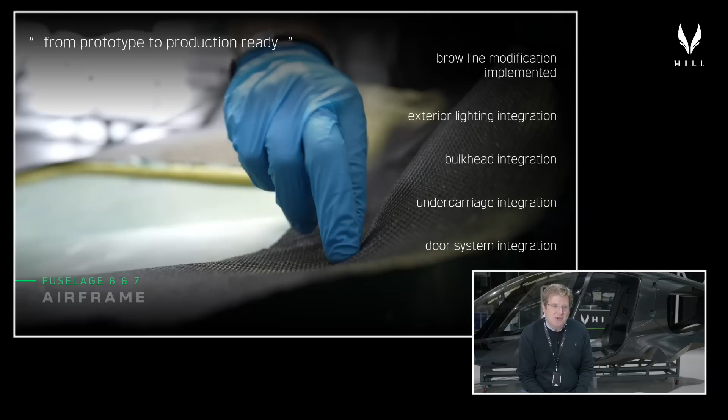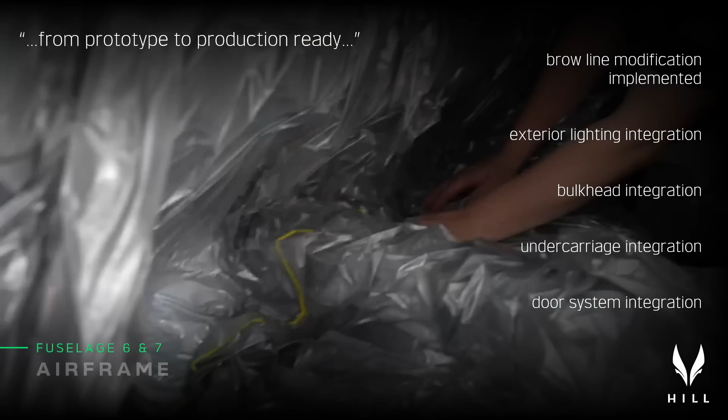Let's start with an update on the build of fuselage 6 and 7. As I explained last time, these fuselages are a culmination of everything we've developed in the program to date. All of the improvements and enhancements to manufacturability, processes, and core design are embedded into both fuselages. They include the brow line modification for improved view angle, the exterior lighting integration for our developed lighting clusters, the carbon fiber bulkhead integration, and all of the mechanical components needed to receive the undercarriage systems and the cabin door systems.

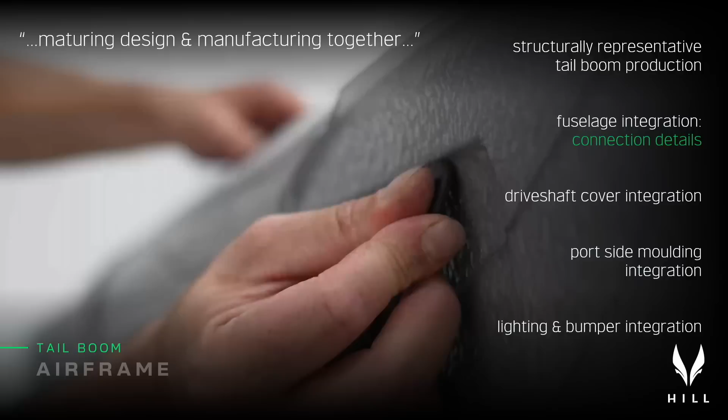In addition, we've been working through the development of the first two structurally representative tail booms. These include all the features needed to attach structurally to the monocoque, all the features to attach the drivetrain and mechanical components, and a representative laminate as well. All of those things are in there, and we'll be heading down to DC2 to have a look at these in just a second.

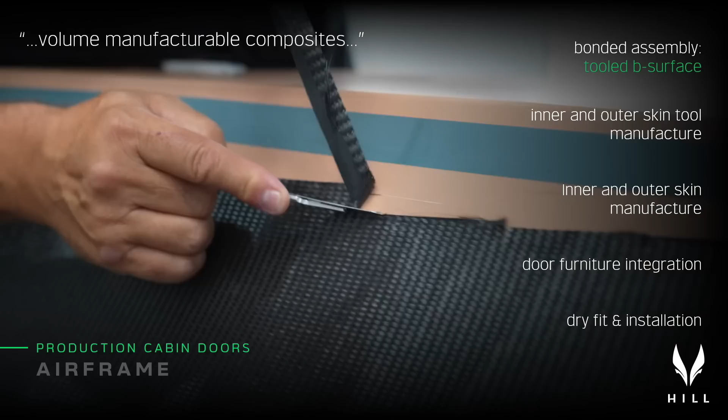We've also been extensively developing the new versions of all the cabin doors. These are the cabin doors that use bonded assembly, with both a tooled exterior skin and a tooled interior skin, trapping all the door furniture and bringing those together in a much more production-oriented process. I'll give you a significant update on those directly from DC2. So without just looking at slides, let's head down to DC2 and DC3 now, and I'll show you what we've been doing over the course of the last month or so.

Welcome to DC2, and at the moment down here it's doors, doors, doors. The guys are furiously laminating the doors for the front of the fuselage, the rear of the fuselage, and the cargo doors. There are 12 to do in total for the two airframes we're building at the moment. Let's go and have a look at what they're actually building.

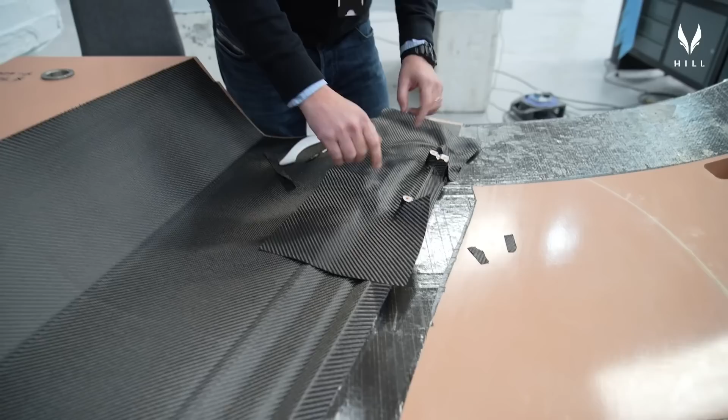If we move over to this station, we've got a similar operation, but this time it's a rear passenger side door. The first plies are down, the door handle metallics are in there, and the guys are just laminating over the top to trap and bond the metallic inserts into the fabric of the door.

Again, you can see the modification we've introduced here, where we've built in the notch to receive the signature lighting strip that we've got built into each of these doors.

There's a further pilot's door skin here, so this is a front door, pilot's door, outer door skin. That's being laminated and should be ready for curing later tomorrow.

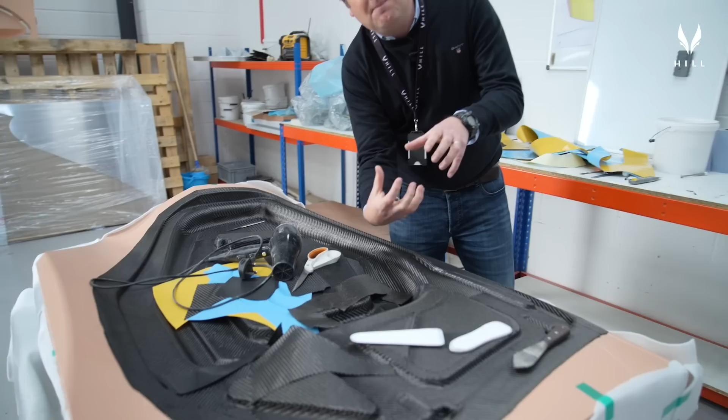If we go down here, you can see the internal skin of the baggage bay door. The internal skins tend to be much more intricate because these are the skins that form the depth of the structural sections that give the door its stiffness and provide the pockets for the hinges and the locking mechanism and everything else needed to make these doors work.

Once these panels are cured off, they go into a glue jig, they're glued together, and then they can be trimmed and fitted to the airframe using the hinges and other mechanical components being developed up at DC1.

The only other thing we've got going on here at the moment is another B surface. This one's a little bit further on, it's under vacuum bag being debulked, ready to cure shortly.

If we go have a quick look at what we've got going on in the oven, excuse the darkness. We've just shown you the internal surfaces for the cargo doors. What you've got here is a left-hand and right-hand external skin for the cargo doors on both sides of the airframe. They're all bagged under vacuum and ready to cure.

We get a full oven load of components in here this evening, and this will be curing right now while I'm talking to you guys.

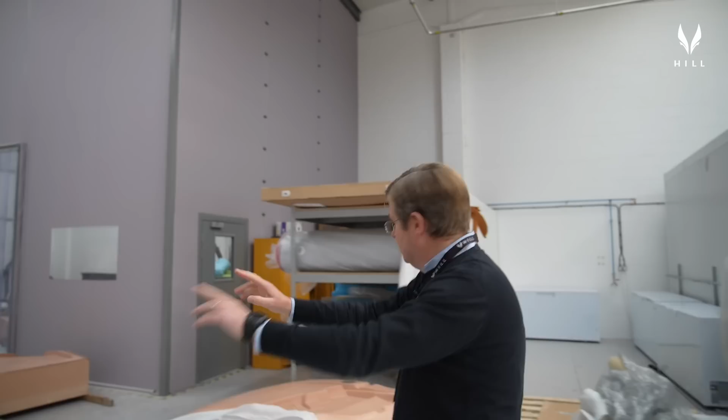Let's have a quick look at what's on the gantry mill. As you can see here, we've also got other tools waiting to be laminated. We've got rear door B surfaces for port and starboard, and we've got the rear cabin bulkhead, that's your baggage bay bulkhead there.

And then what we've got here, this is the co-pilot's door inner skin. So this is the last of the door tools we need to make to be able to produce the final door for the HX50 fuselages.

One thing you might notice is that one side of the table on the gantry mill is inoperative at the moment. We're having more issues with this machine, and I'll talk about what we're going to do about that a little bit later in the presentation.

Let's go over to DC3 and have a look at some fuselages. Welcome to DC3, and this is where things are getting really exciting.

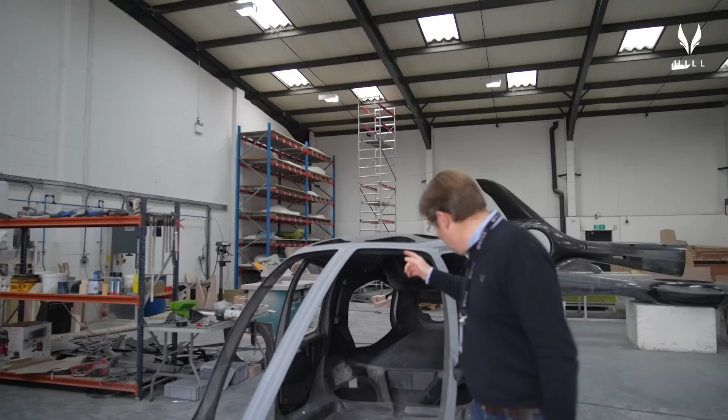We focus on laminating and component production over at DC2. Here in DC3, the guys are doing a lot of the gap and flush and fit and finish work on the full airframe. This is airframe 6 that's just come back from its first layer of surface treatment and paint production. What you can see here is we've now got the updated brow line into this fuselage and fully worked in.

The exterior has been prepped from a surface point of view, so it's ready to be painted. You'll also see with this one that a lot of the metallic elements of the structure required to mount the undercarriage are in there also.

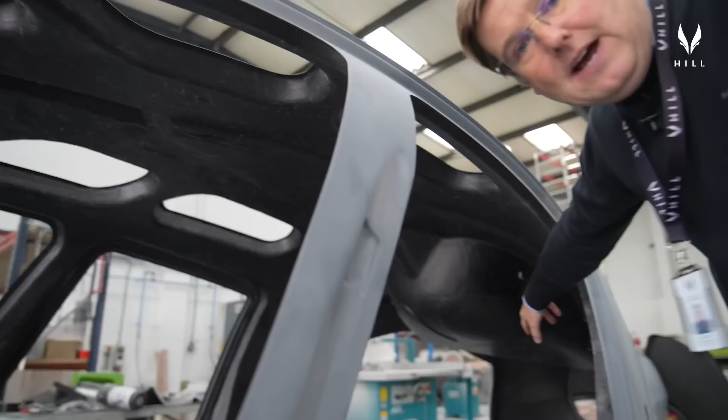You can see the undercarriage mounting pads down in the stub wings, and the receptacles for the undercarriage locking struts. We've also got all of the metallics up in the roof to pick up the gearbox, and of course all of the metallics down in the tail boom to pick up the structural loads from the tail boom. The fuselage has been fully trimmed, so all of the apertures have been trimmed back to size.

On these prototype airframes we're doing that by hand using the trim lines built into the tools and patterns. In production this will be robot trimmed using a bigger version of our robot that we'll show you down at DC1 a little bit later.

In addition to this, the other things we've been doing is essentially making sure we've resolved all of the edges properly so that when we come to fit the doors, we've got nice clean gap and flush.

We've been tidying up the edges for the glazing, where it fits on top. You'll notice here we've got a test cabin baggage bay door skin - this is an outer skin. You saw the inner skins being produced over in DC2. That's been trimmed and is up there just to dress it and get it ready to be fitted.

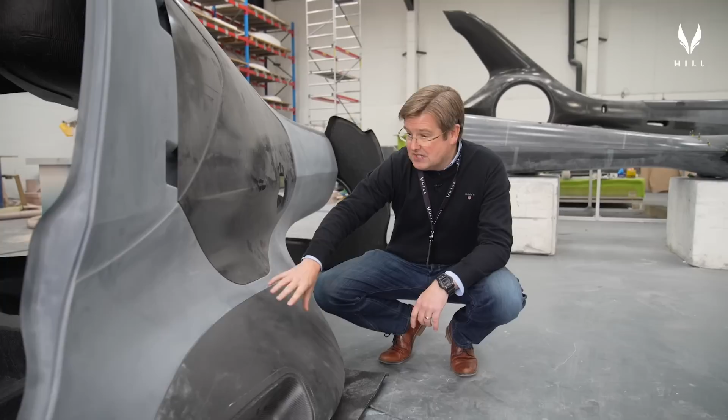You'll also see for the very first time that we've got the non-structural wing covers on the airframe. You're used to seeing just the structural elements, the painted part. This is the wingtip cuff that makes up the rest of the A surface you're used to seeing in the renders, and this is the recess for the landing light, the wingtip element, which I'll show you later.

Really pleased with how all of this is coming on - it's looking absolutely great. The fit and finish of these components has really exceeded my expectations, particularly given the challenges of working with very hastily produced prototype patterns and molds. But the guys have worked wonders getting this all to sit together right. I'm really excited to see the rest of this come together and get it painted up and finished.

In addition to the external fittings - the wingtip covers, the doors - we've also got structural internal components. This is the carbon rear cabin bulkhead, which fits inside the fuselage at about this point. This big molded aperture is so we can get the bladder fuel tank into the cavity between the cabin rear bulkhead and the baggage bay bulkhead, and it fits snugly inside there. It's been dry fitted and fits just fine, which is good news. We've got two of these waiting to go into the fuselages as we assemble them.

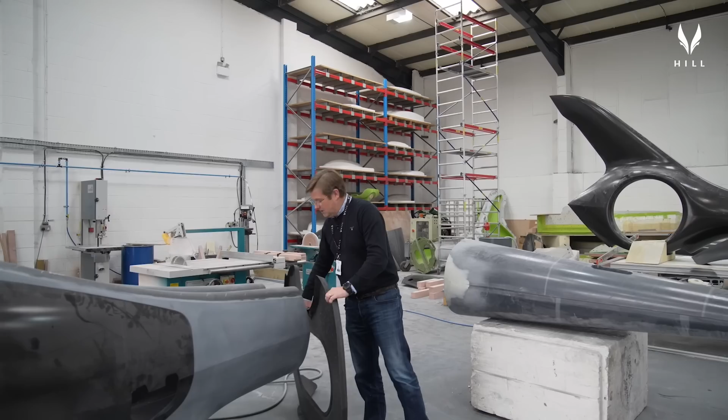That's all good. I showed you over the road that we're busy laminating doors. This is a B surface for one of the rear cabin doors. Again, it's an extremely light piece of structure, but all of this integrated form provides the structure we need to carry the armrest loads and pick up all the locking mechanism details as well. Really pleased with how the guys are getting on with the door skins - they're coming together very nicely.

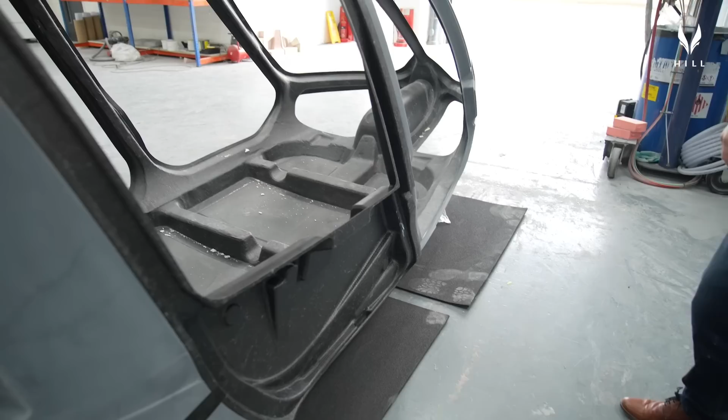If we go around and have a look on the other side of the fuselage, you'll see we've also just offered up the very first trimmed B surface. This is the rear starboard side door, and it fits just nicely - the overall form of it's fine. We've got to get that bonded up now, well, skin pinned with its A surface. That'll take account of the pushback from the seals once we get those fitted, and then that door can be hung and will sit really nicely on the fuselage. Really pleased with how that's coming together.

Let's go and have a look at what we're doing with tail booms.

This is the second structural tail boom that we've produced, and it's had the most prep work done on it to date. As I mentioned earlier, all of these composite components have been manufactured with prototype tools that were very hastily put together. They were all about process development, not about getting the most perfect surface finish. So to get these paint ready, the guys have had to do a lot more patchwork, filling and sanding than you would do in production.

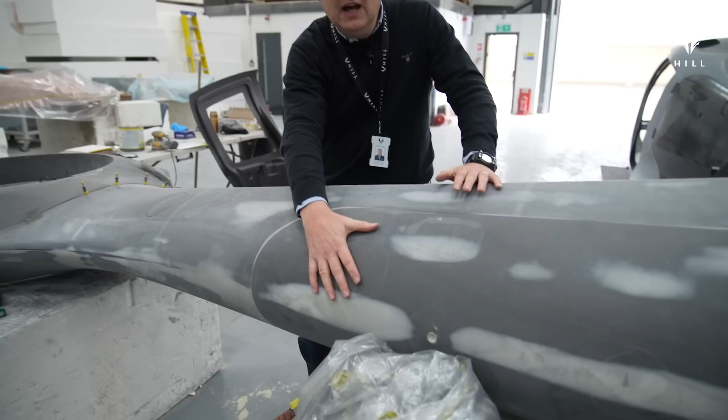What you can see here is the structural element of the tail boom - the tail boom cover that covers the drive shaft as it goes down into the tail boom. For the very first time you'll see the second side of the tail boom. The construction is made in one piece, except for this top closure on the exit side of the duct, which allows us to trap all the internal fixtures for the stator of the ducted fan assembly. This panel has been trimmed and bonded on today, and the final stage is to fit the bumper panel on the bottom. We've also made the modification here to take the modified tail light, which I'll show you a bit later in the presentation.

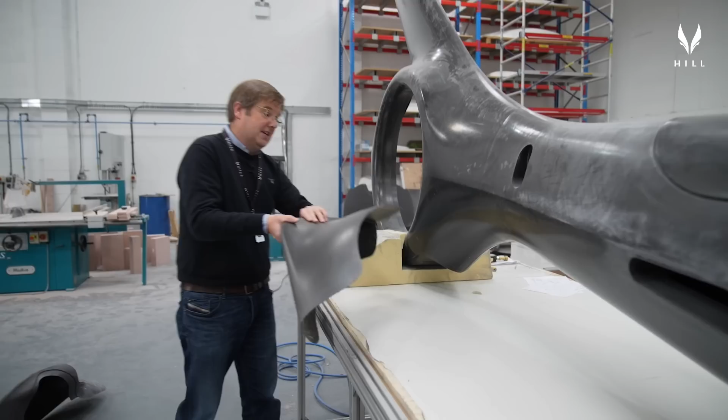From across the board down here, the guys are making fantastic progress on all of the composite elements of the program. We've got fuselage 7 out at paint at the moment, and then we've got a bunch more fitting to get the tails integrated. All we've really got left to make in terms of composites are the last of the doors and the non-structural elements that sit on top of the fuselage. Fantastic progress from across the program over the last month.

Let's head up back to DC1.

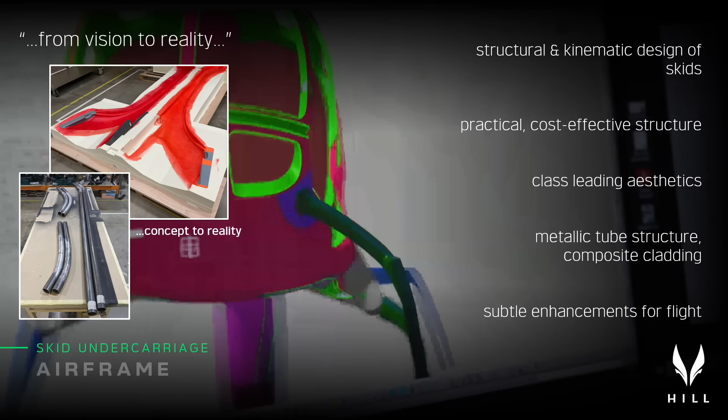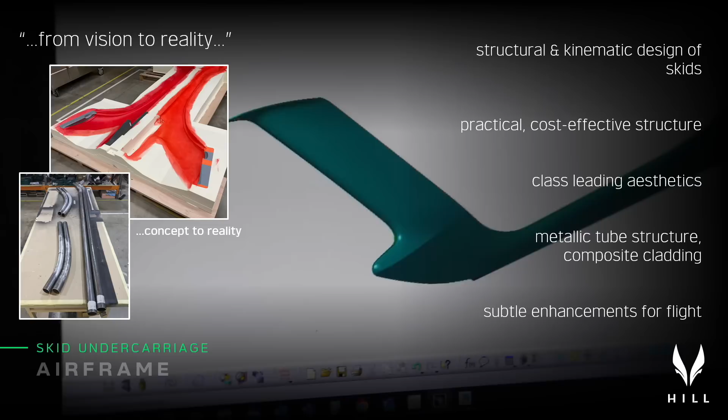In addition to the work on the core fuselage, we've also been doing a lot of work on the first set of prototype skids that will be sitting on fuselage 7. These are structurally and kinematically representative of the skids we'll use in the flying prototypes, the only difference being there's a bit more weight to come out of these before they're ready to fly. We've come up with a practical, cost-effective structural design, a hybrid of a conventional metal tube structure that couples nicely back to the dampers in the fuselage, with a cladding to deliver the sleek look of the skids.

The metal tube structure is currently about halfway through being produced, and we've just finished the molds to mold the composite cladding that goes around the legs and down tubes. We've also been developing all of the mechanical components used at the top end of the skids to fit them back into the fuselage structure. There's actually on the 5-axis over there the last of the receptor couplings that connect to the metallics buried into the structure, so really pleased to see those coming along. I know there's a lot of guys out there keen to see how we're doing with skids, so just a little update: they're coming, and they're going to be ready for December.

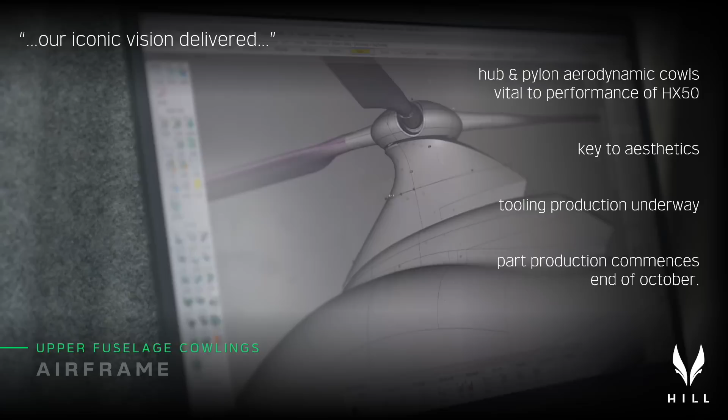In addition to that, one of the things most distinctive about the HX50 is the cowled rotor system and the very carefully aerodynamically cowled pylon and mast. This is a particularly difficult area to do well because of the movement you have to allow around the root of the rotor blades, and it's also really important that we deliver on the aesthetic promises of the design. I'm pleased to say we've delivered this in spades - I'm absolutely over the moon with how this has come out in final design.

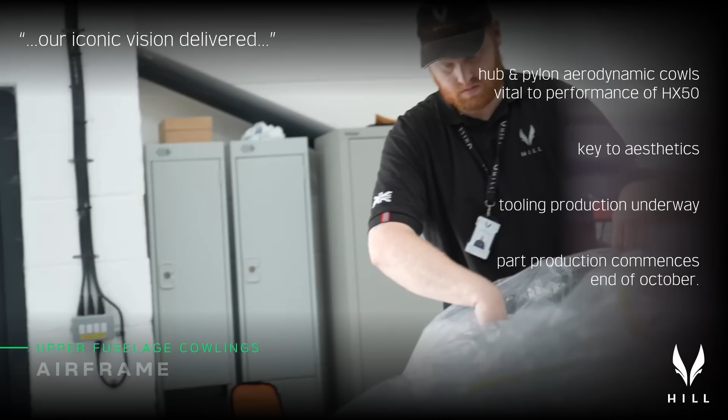The production tooling for all of this is currently underway. The guys are busily finishing the last of the tools to develop all of that cabin top structure, both the cowls that surround the engine and all of the plant and equipment that lives on top of the fuselage, and also the donut cowling that surrounds the main rotor hub. We expect part production of those to start in around 2 weeks' time, and those will be the last components we need to make for the two machines we'll be displaying in December. Really pleased to see all of that coming together.

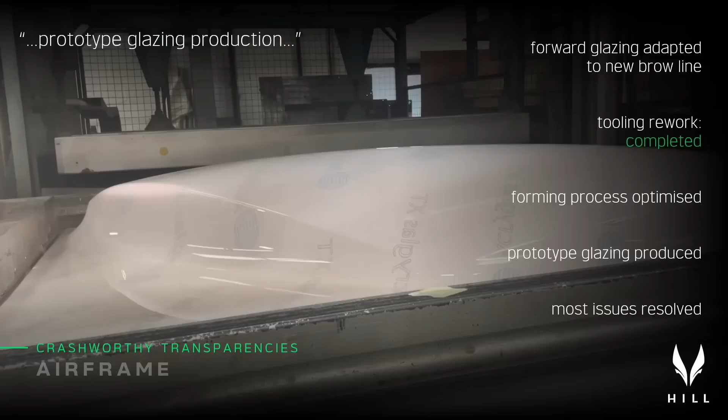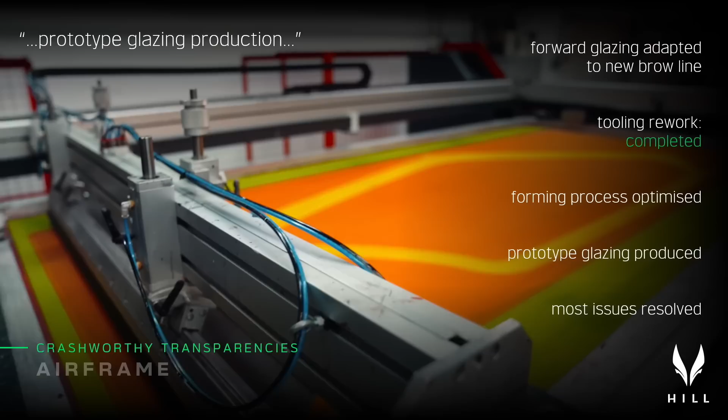In addition to that, we've been talking at length over the last few months about our endeavours to deliver high optical clarity, high quality, crash-worthy glazing for the HX50. We've been doing a lot of development over the last month or two to improve the quality of the tooling we use to deliver optical clarity. It's relatively easy to form these materials, but quite difficult to form them really well, particularly when you move to polycarbonate for the impact resistant windows on the front. We've completed all of the rework to the tooling, taking into account both the shift in the brow line and the surface rework needed to deliver a surface capable of producing optically clear windows.

We've optimized all of the forming processes necessary to deliver high quality windows, and we've now started to produce the full batch of glazing that we're using for the two machines we're delivering in December. Fundamentally, all of the roof windows and side windows are now at a level we're satisfied with for production. We've got a couple of issues left to sort on the chin windows, but fundamentally we're satisfied now.

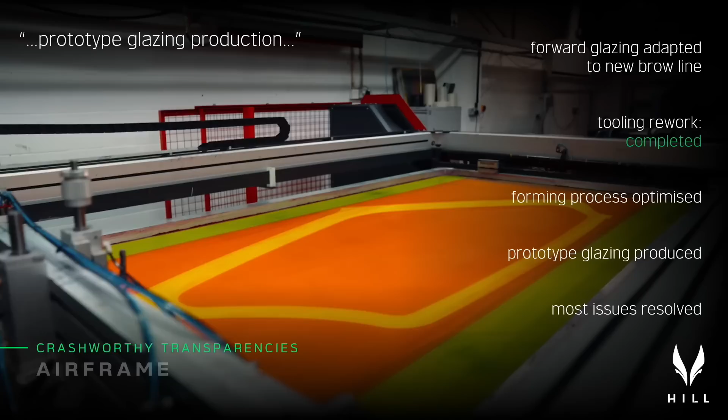Let's go and have a look at a couple of the examples we've got lying on the shop floor over here at DC1.

So what you can see here is the first of the vacuum formed chin windows that's been developed using the latest tooling. All of these areas here are excess material that will just be trimmed off, and the actual chin window, which sits under the nose of the helicopter, is this portion here, and the trim line sits about an inch inside this. These are now being produced to a quality that's sufficient from an optical and performance point of view.

There's a few things we'll refine for series production, but these are plenty good enough for where we need to be at the moment. These are the most difficult windows on the whole aircraft to produce, because they have curvature in both directions and it hugs the tool very closely. Until you're using heated aluminium tools that are highly polished, this poses real challenges for the composite tools and the model board tools we're using at the moment to keep costs down while we go through the development process.

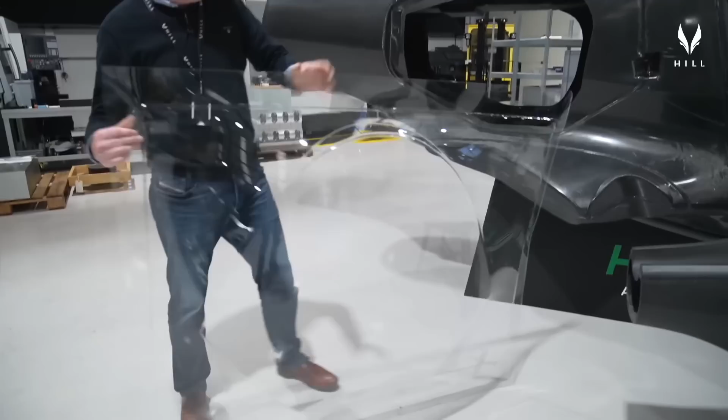What you can see behind me here is the forward roof window, and this one is a lot simpler to form to a high degree of optical clarity on account of the fact that it's a lot flatter and has a lot simpler curvature.

So we've got all of these produced now, and we're expecting to get these units trimmed over the course of the next week on the gantry mill, and then they can be dry fitted on the fuselage, ready for the rest of the panels to butt up to. Really pleased with how the glazing's coming on.

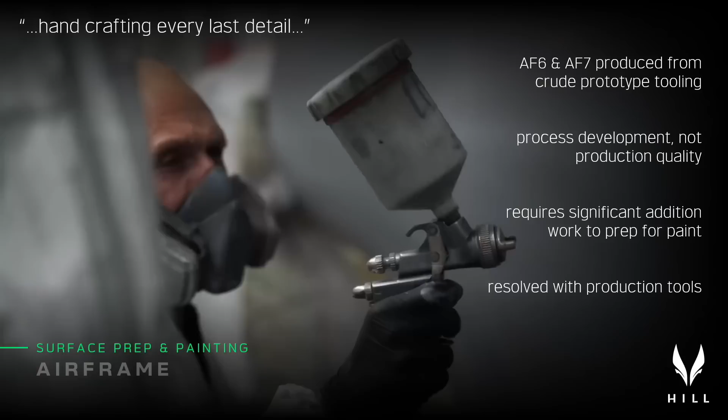One of the areas that we always knew was going to be challenging was painting these early fuselages. As I've said on multiple occasions, the tooling we developed for the early stage prototypes for HX50 was very much about bringing together all of the elements from different industries necessary to make cost-effective composites at this scale and in these volumes. What that has meant is that it was very much an expedited process - all about the process development and not the finished surface quality.

So the surface on the tools we've been working with to date isn't at the same level it will be in production. What that means is, unfortunately, the paint guys have an even harder job to do to get a decent paint finish on these things for the first fuselages.

Over the course of the last week, fuselage 6 has been out at the paint shop, and the guys have been doing all of the surface preparation, priming and surface rectification to get that fuselage up to the point where it's a high quality paintable surface, and they've done an amazing job.

Don't worry about any of these details, because fundamentally all of this comes from the tools, and with the new gantry mill arriving in January and the refined production processes for patterns and tools, all of these things will come straight out of the mold for production.

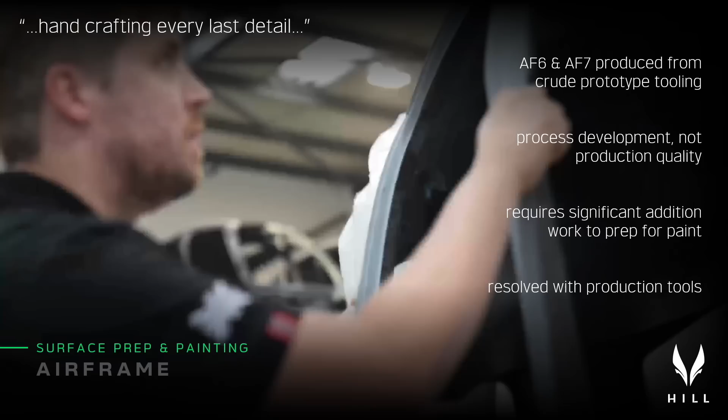Over the course of the last week or so, fuselage 6 has had its several coats of primer and a lot of surface work, and fuselage 7 is out at the paint shop right now, getting ready to receive its final colour. Really pleased with how that's gone over the course of the week.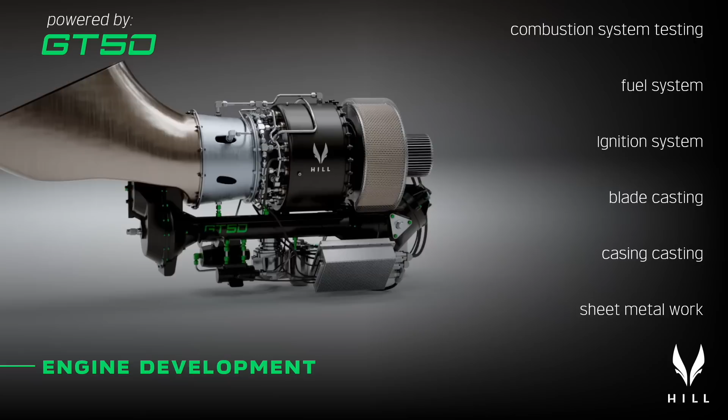Let's talk about the engine program for a little while. Over the course of the last month, our main focus has been about preparing to do the combustion system testing. We finalised the design of the combustion, the core combustion test rig elements. All of those things are now either here or in production at the moment. We have essentially produced now all of the fuel nozzles and the air blast atomizers, and we have the ignition system here.

We've also been doing some further work on blade casting, and I've got some good news to report on that. And we've been starting the journey on the casting of the big thin-walled casings, which is one of the other challenging areas with the engine development. We're now converging on the finished annular combustor itself, and I'll be showing you a little bit more of that in a second.

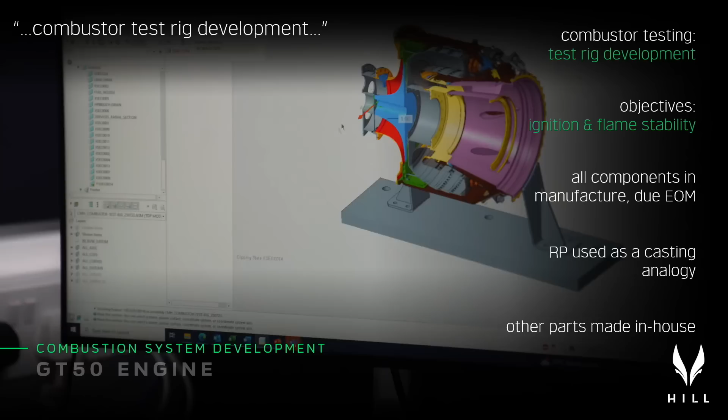So as I mentioned, a lot of the work over the course of the last month has been about refining the combustion test rig and getting all of the additional equipment you need beyond the engine hardware to run a successful test. The guys have been efforting that over the course of the last few weeks. The objectives, of course, being to show that we can get effective ignition, stable combustion within the environment, and get that fire burning.

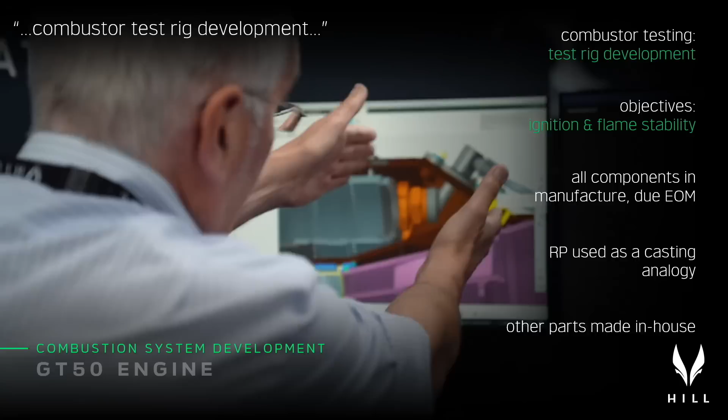All of those components are now in manufacture, and these will all be here before the end of the month. One of the things that we are doing for the combustion test is using rapid prototyping as an analogy for the casting processes for the casings, just to give us the flexibility to change anything that we need to before we go on to the full-blown gas generator test. Everything else that you can see in the combustion test is being made right here at DC1.

So if we talk for a second about the annular combustor, we've now perfected the rolling process. We've perfected the stretching process to produce these annular rings perfectly to tolerance, and we're now building up the stack of internal and external rings ready to get that welded together, and I shall show you that in just a second.

We've had some issues with spinning the end cap, so if you think of the end of the donut on the annular combustor, and so the guys have been machining some of those components from solid rather than spinning those in the short instance. In production, those parts will actually be pressed, but I'm loath to lay down a press tool until we know we've got the geometry right. So Mark's been working around that for us, and I'll show you some of the components that we've been making in just a second.

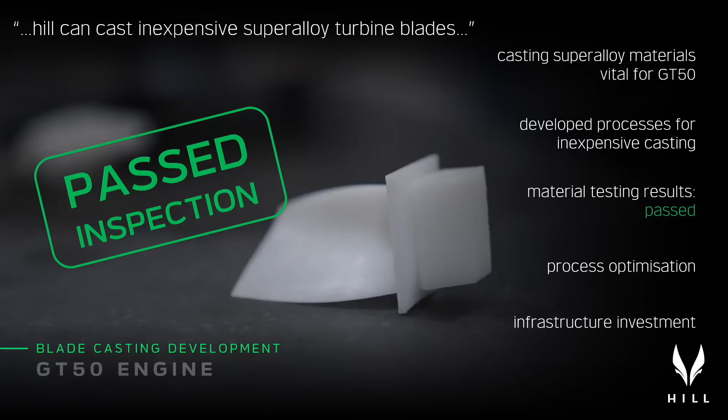The other big news is that over the course of the last few weeks, we've been doing a lot of NDT and a lot of inspection on our in-house cast superalloy turbine blades for both the gas generator and also the power turbine. And I'm delighted to report that we have now concluded that work and we've passed all the inspection criteria. So Hill Helicopters can now cast inexpensive superalloy turbine blades in-house, and we're doing so ready for the test engine. So really pleased with that.

The scanning electron microscope results were just what we were expecting. We've got a little bit of process optimization to do, which I'll show you in just a second, and then we're ready to invest in the casting infrastructure to enable us to do that in volume as we go into production.

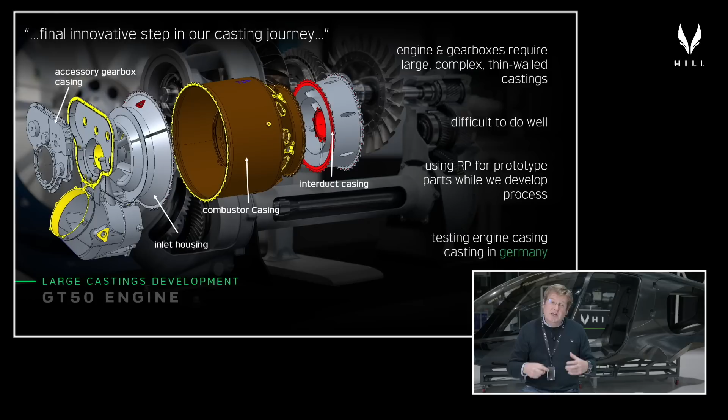The final innovative step in the casting journey is to be able to cast the large casings that we need for both the engine and ultimately some of the aluminium casings we need for the aircraft gearboxes as well. The challenge with these casings is that they are extremely complicated, they're quite big, and they have very thin walls. And what that means is it's actually difficult to get the molten metal to flow through those cavities without solidifying too quickly and blocking the cavities before you've cast the part. So we've been developing with our casting partners some very clever processes to enable us to do that for the types of parts that we need.

That work is ongoing at the moment, and we'll be traveling out to Germany over the course of the next month or so to finalize that step. Once we've finalized that step, that is literally the last part of process development that we need to do to make this engine. This isn't something that's holding us up for the prototype engine because, as I said, presently we're using rapid prototype parts for the casting, which is a perfectly representative process to do. So let's go and have a look at some of these details on the engine.

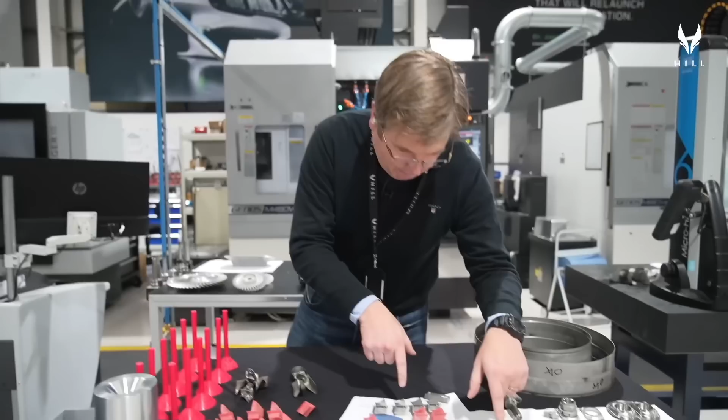So, as you're aware, we've been casting both power turbine blades and gas generator blades using trees. So part of the process development that we've been doing is looking at the different performance of block molding and shell molding, and we've now got specimens back from the test lab that used both block molding and also shell molding. The benefit of block molding to us is that it's a substantially cheaper process. It's much faster to execute, and the equipment we need to do that is far less expensive.

To facilitate all of that, we've been doing a lot of development in the process for making the wax trees that you need to be able to hang a load of these turbine blade waxes and create a cavity that allows you to create multiple turbine blades in a single shot. So we've produced some tooling that essentially allows us to cast a wax sprue onto which we can then weld the individual turbine blades, drop that into the block molding slurry, and then melt this out, and we've got our casting void.

What you can see here is the very first Hill produced block molded gas generator turbine blades, and here we have the analysis report that shows that they conform geometrically, and then on top of that we also have the metallurgical report back now that shows that the metallurgy is right, the crystal structure is right, we're making good blades. These have now got to go off and be hot isostatically pressed to make sure we close off any voids, x-rayed, and then these can be ground and are ready to go into an engine. So really pleased with how that's coming together.

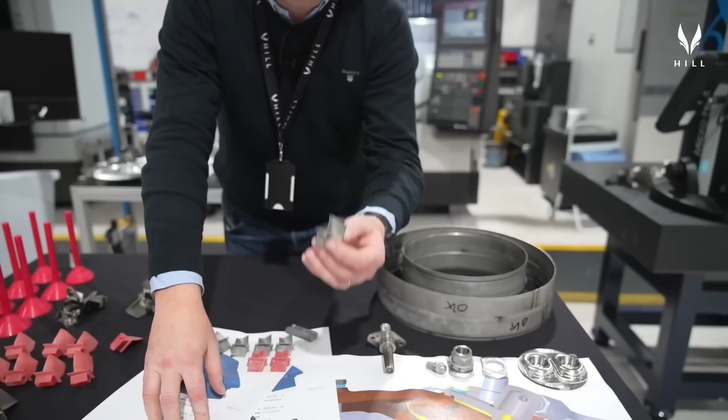We've also done the same for the process with shells so that we can compare the metallurgical properties and the mechanical properties to see if there's any advantage to us in sticking to the older ways. I don't expect that there will be for the turbine blades. I think the process gives us much more control doing it with this slightly more modern approach. So really pleased with how that's going.

If we move on to the combustion system now, you've seen over the period of the last few months, we've been laser cutting and rolling and forming and profiling the rings to make up the annular combustor. And we've now got this process to a point where we're making these things to tolerance. And what you can see here is a couple I've just pulled off the work shelf over there. This is the size of your annular combustor. These are conforming outer rings, conforming inner rings. These get grown up to about this height, capped off. There's a bird mouth in the center that feeds into the gas generator turbine nozzle, and then we're good to go.

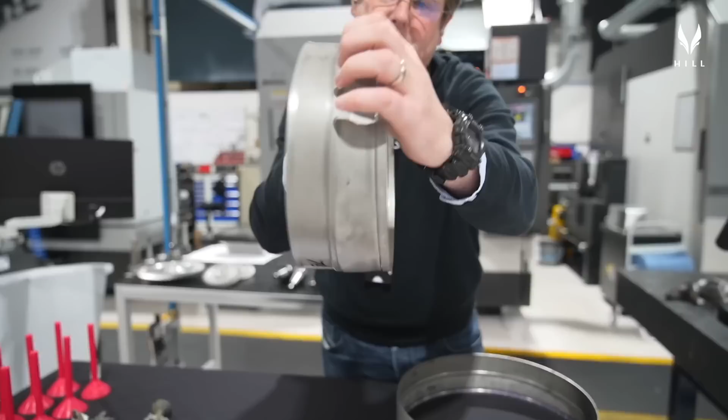And the way these things work, the reason why these profiles are so important is if you look at the subtle gap at the top here, the void that's created by this change in profile, that's the area that, when we drill holes on the back of this lip, feeds cooling air down both the outside and the inside of these thin sheet metal pieces to be able to put a blanket of cooling compressor delivery air over the metal to keep the metal temperatures down to a level that they can survive. So the geometry of that is really, really important. It's fiddly stuff to do, and we've cracked it. So the first combustor is well on its way to being completed now, and as we get to the end of the month, this thing will be built up and welded, ready to go into the test rig.

If we just have a look at some of the other components that we've been producing, that component that sits around the end of this combustor can will actually be pressed. There'll be a sort of donut annular tool. Thump, you press it out of sheet metal and away you go. Quite simple. Those press tools are quite expensive for this sort of material, so what we've been doing is trying to spin those, which hasn't really worked very well. So we've made a simple tool, and then Mark and the guys have just been essentially making some machined inserts that can be welded in that will receive the air blast atomizer.

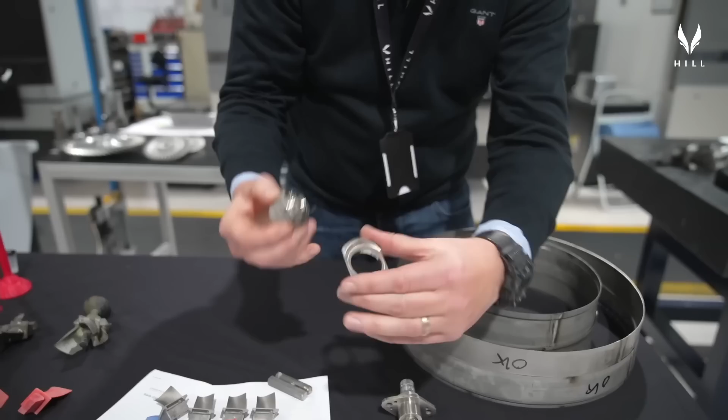So what you've got there is the swirler nozzle. So that's the back face of the combustor here. The swirler nozzle goes through there, and inside that swirler nozzle we have a fuel injector with integrated last chance filter. That sits just inside that assembly there, and what you've got here is a small fuel nozzle, and out of this void comes swirling air that smashes the atomized fuel into tiny particles that give you nice clean combustion, which is both highly efficient and minimizes the amount of sooting that we get in the engine and ultimately down your tail boom. So really pleased with how that's coming on.

And then the other piece of the puzzle that's dropped in recently is we've taken delivery of the first few igniters that fit in the bottom of the combustion chamber to get the fire started. So really pleased with how the combustion rig's coming together. And like I say, we should have all of these bits on hand and ready to assemble within this month. So we'll get that test done just as soon as we can. Let's head back.

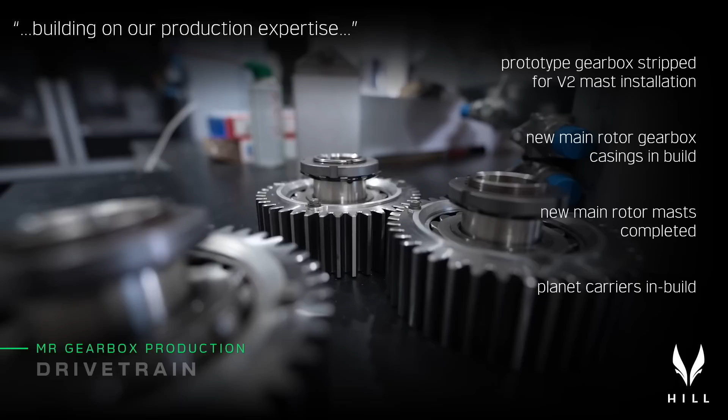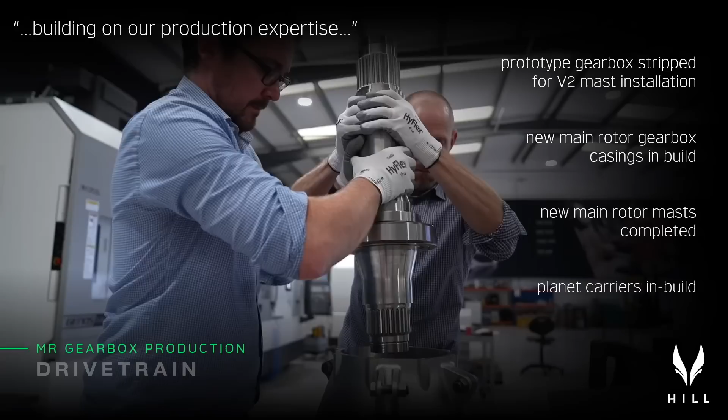So let's talk about the drivetrain and gearbox production for a second. So as you're aware, we built the first HX50 gearbox about 12-18 months ago as essentially a lubrication test rig, proving that we could get lubrication into the bearings and the oils to drive the gearbox at the powers that we want to have the life that we want to, and to ensure that the gearbox can run dry as required by the certification requirements.

Since that gearbox was built, we've made a bunch of modifications to the gear design, to the lubrication strategy, and also to the mast design. So what we're doing at the moment, we've got that gearbox stripped, and we're fitting the new mast with the rotor hub assembly on the top of it into the gearbox. And we're also producing new casings for the 2 additional gearboxes that we're producing for the 2 aircraft to be displayed in December. So really pleased with how that's coming on.

Let's just go over and I'll show you some of the bits that we're producing right at the moment. So what you can see here is these are some of the strip components from the original gearbox. This is the new Sprag clutch that I showed you a month or so ago. You've got your planetary set and your spiral bevel set that is the first stage into the gearbox.

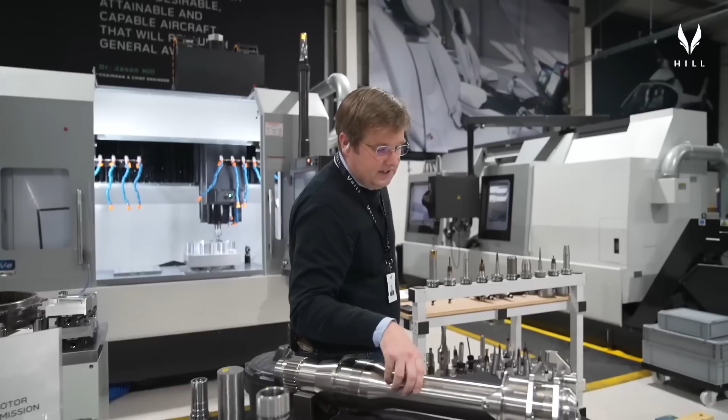And here is the very first second generation rotor mast for HX50. So this has got the latest spline detail, the latest connection detail to get the rotor mast connected into the transmission, and all of this new stuff that you can see at the top is the very first components that we've produced for the HX50 rotor system.

So you've got the upper and lower clamping plates that are splined onto the main rotor shaft, and just so that you can understand where it goes, essentially they clamp the strap packs that provide your flapping and also your feathering motion for the rotor system. So all of that's coming together very nicely.

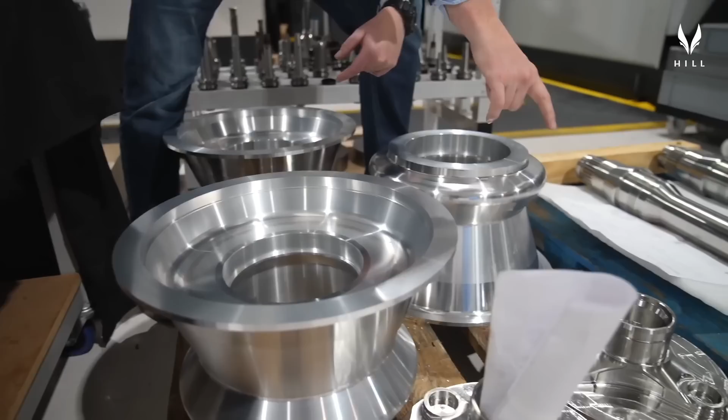What you can see down here on the bench is we've essentially got the upper casings for 2 additional gearboxes that we're producing at the moment. We're part way through machining the planet carriers for 2 of those gearboxes, and we've got the remaining 2 rotor masts there just waiting for the final couple of operations to receive the rotor head on top. So really pleased with what the guys are doing on transmissions. That's all coming together very nicely just in the nick of time.

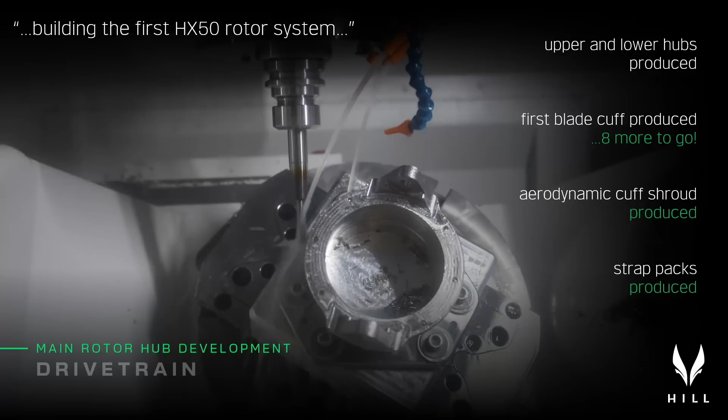So one of the things that's been particularly exciting over the last couple of weeks is that we're now deep into building the very first HX50 rotor system. The upper and lower hub parts have been produced, as I've just shown you over on the bench. These are the components being machined on the 5-axis, and we've currently just finished this afternoon the very first HX50 blade cuff. So this is the part that receives the composite rotor blade.

It houses the elastomeric lag damper. It connects to the strap pack that facilitates all the blade motions. It's aerodynamically designed, and it also connects to all of your blade fold features as well. So we're really pleased with how these have come out. Let's go and have a look at that on the 5-axis so you can have a look at what we've been doing to deliver these key components.

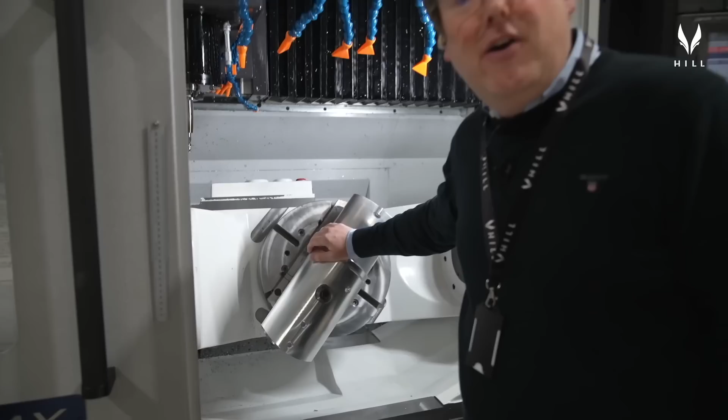So this is the second 5-axis machine that we added recently, and here is the very first HX50 blade cuff number 1. So this is a part of the blade, so that the rotor blade root connects here, the lag damper lives inside here, the strap pack lives in here, your pitch control rods or your rod ends attach on this lug down at the bottom here, and then the aerodynamic cowling that works into the rotor system fits up against these components here.

So that's the very first one that we've ever produced, and what you can see right here is the next 8 that have had their internal machining ops done, that are just waiting for their turn on the 5-axis to be turned into rotor components. So really pleased with how that's coming. Let's talk for a second about the swash plate assembly.

So some more fun stuff. One of the other things that we've been building recently is the swash plate assembly and all of the flight controls that sit just below the rotor hub.

So let's go and have a quick look at the build of the first 3 HX50 swash plate assemblies. What you can see here is the assembly drawings for the whole system: the spherical bearing, the swash plate assembly, and all of the detail that the guys build to. Over here you've got the collective jack beam.

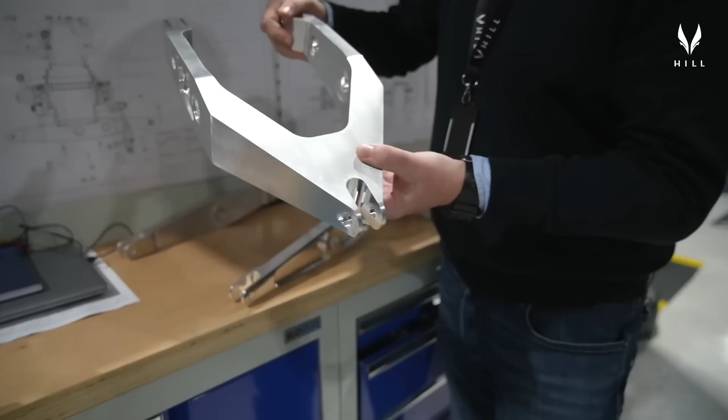This is the beam that lifts the whole swash plate system up and provides collective pitch. And then you've got the pitch and roll jack beams as well. So your cyclic is connected to these two, and your collective is connected to this one.

Over here we've got the first 3 swash plate assemblies, with the fixed swash plate assembly at the bottom and the rotating assembly at the top. The only thing we're waiting for at the moment is this part that I showed in one of the customer updates - we've actually machined these. They've all been made, but they're out at the moment being anodized and then PTFE coated, so that we've got the lubrication for the spherical bearing.

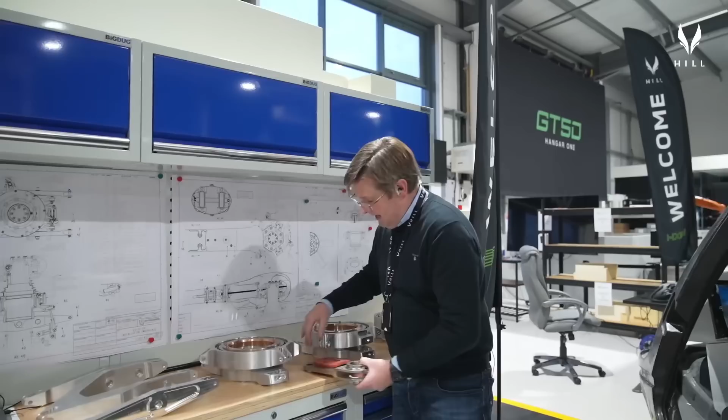Those 3 assemblies, 2 for the aircraft and 1 for a static test rig, have been built. And what you can see here is yet to be completed - the mechanical and the elastomeric part of the lag damper that's buried inside the blade cuff. Really excited to see this stuff coming together. It's a really exciting time to be around here at DC1.

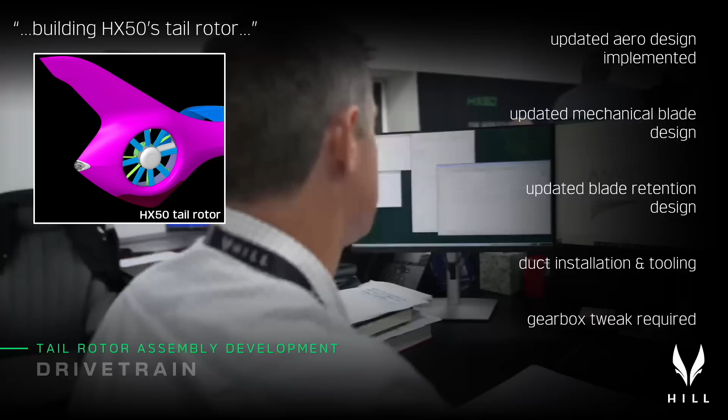So one of the areas that we talked extensively about in the early days, but we haven't talked about much since, is our ducted fan tail rotor. We're designing the tail rotor on HX50 to have a great deal of authority, even up at hot and high altitudes. We've got 8 asymmetrically spaced blades, a very deep duct, and then linearized characteristics through the way that we've done the control rigging.

We've updated the aerodynamic design. That design was done a long time ago, but it had been a while before we could get capacity onto it to get the mechanical design updated in the aircraft. That's now done in terms of the blades, the pitch change mechanism, and the overall housings and blade retention. We've got a little bit of work to do left on the gearbox, but essentially that's now updated and also being produced right now at the moment.

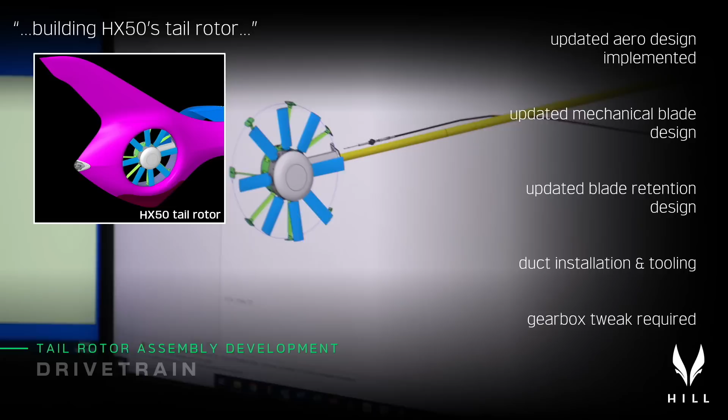What the guys are doing down at DC2, and you could see it in the images I showed you during the walk around, is we've developed all of the tooling and the jigging necessary to be able to drill off and provide the fixtures for the stator into tail booms 2 and 3 that are down there at the moment. So the guys are providing all the provisions at the moment to get that tail assembly into the duct of the 2 aircraft. Really pleased with how that's going.

The performance of the tail rotor is incredible. We still maintain directional control with 35 knots of wind from any direction, even up at 10,000 feet. So barring any nasty surprises on test, we should have an awesomely powerful tail rotor. The only thing we've really got left to do on that is a minor gearbox tweak, which will be picked up early in the new year. Really pleased to see the tail rotor coming together.

The other thing that's gone on over the course of the last week is, obviously, as we get closer to flight test and get deeper into our approvals process, we're having increasingly regular meetings and engagement with the regulators. Over the course of the last week, we've had a very successful visit from the engine and transmission specialist at the CAA.

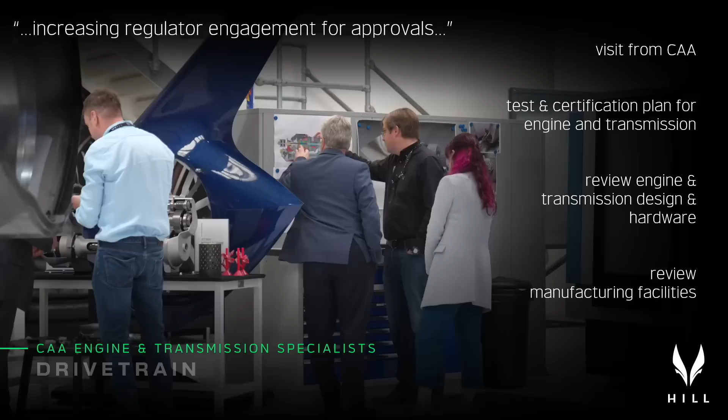We've been going through our test and certification strategy and some of the detailed elements of the test and certification plan for the engine and drivetrain elements, because all of those are going to be the first things we need to do in order to get enough hours on the bench to safely de-risk the flight testing.

The meeting went extremely well. The guys were very impressed with where we're up to and what we've got done, and our new lead of engine and transmission certification performed extremely well, so we're in safe hands. The approvals process is going as well as can be hoped for where we are in the program, so really pleased with that. The guys were also delighted with the capability we've developed here at DC1 for bearings, gears, and other critical components in the engine and drivetrain. So a very successful visit, full stop.

Let's talk about the digital cockpit for a second. I teased a little bit last month that we've been doing a lot of work on the IPI, the integrated pilot interface that distills the big stack of black boxes in the center of your cockpit into one single 7-inch screen. We've now developed a great deal of detail on it. The user interface has been refined and optimized, the menu structure developed, and Eric is busily implementing that into the software environment ready to be loaded on board the aircraft.

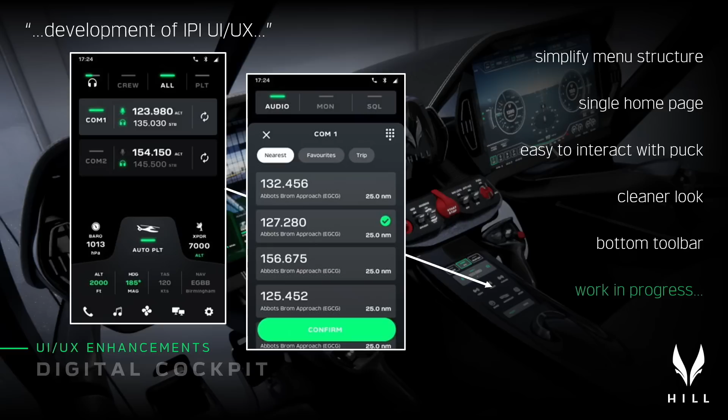We've got a much simpler menu structure, a nice simple home page with a very shallow structure. It's much easier to interact with the puck, it's a cleaner look, and we've got an accessible toolbar at the bottom that gives one-click access to pretty much anything you could want to do with the IPI. It's still very much work in progress, but you'll get to play with this at the event in December and make your own mind up whether we've done a good job. I think the guys have done an incredible job myself.

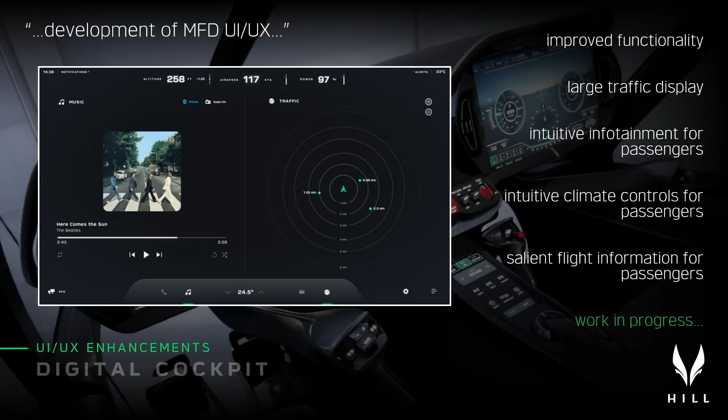We've also been doing more work on the MFD, the second screen on the co-pilot side of the aircraft. You've got video feeds available on that screen, and you can have a duplicate set of flight instruments there too. One of the things we're developing for it is a user interface that's much more usable by a non-flying customer, along with a very large traffic scope. These are very much work in progress ideas, so if any customers have thoughts or feedback, please feed it back. In that setup, we've got salient information at the top for non-flying passengers, a big cover flow media center on the left-hand side, and a big, bold traffic scope available to the pilot. Again, work in progress, but we're pleased with how that's coming. And don't forget, we'll be feeding video images as a background to that as well.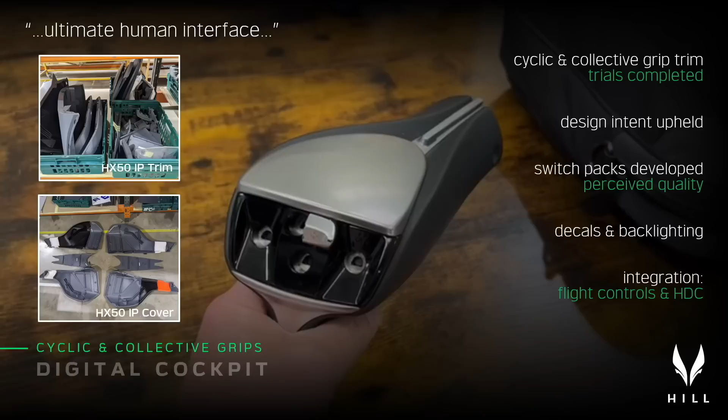One of the other areas really taking shape now is the very first IP. Over the last month or so, the guys have been developing all of the trimming strategies necessary for our cyclic and collective heads. They look very pretty in renders, but they're not the easiest things to trim, and we've developed the techniques to do it. We've developed the backlighting for the decals and dealt with all the perceived quality issues for the feel of the buttons on the switch heads. The only thing left to do is sort out the trigger functionality, and then we're well away with that. Really pleased with how these things are coming on. It feels great, and the trim quality is again far beyond what I hoped, really delivered above and beyond my expectations.

The little inset pictures you can see are all of the components for the first two IPs, the first two instrument panels for HX50, for the two machines for December. They're all in stock now, waiting to be trimmed and then assembled onto the aircraft, so really pleased with how it's all coming together. If we talk briefly about the DigiCockpit, behind me is a second cabinet being used to essentially bench build the wiring looms and all of the hardware and physical equipment going into the two machines at Christmas, ahead of transferring it to the aircraft.

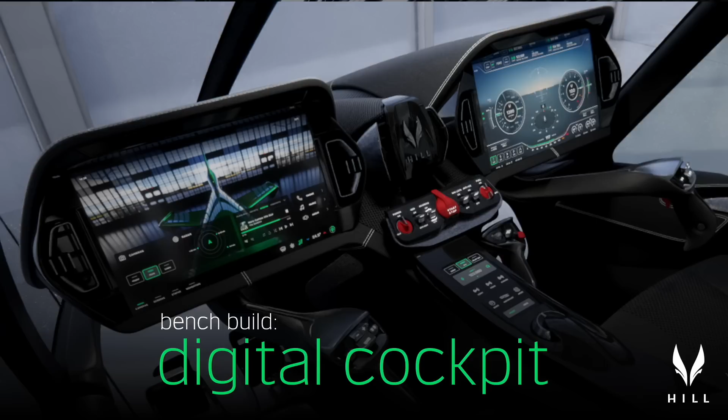So the DigiCockpit corner is a little bit of a mess at the moment because there's so much going on there, but we're currently just integrating all of the hardware, the software and the wiring looms to make all of that stuff work as soon as it goes into the aircraft. So really pleased with that.

One area that we've been talking to customers about but not publicly for a little while now is our exterior lighting clusters. We want to make sure that HX50 is distinctive and elegant and lives up to all the expectations you'd get from a premium automotive product, but also that it works really well as both a day and night VFR aircraft. So we were always very keen that the night lighting and landing lighting we provide is really powerful and safe for use in the widest variety of conditions that we can imagine.

We're now well into prototyping all of the lighting clusters. These prototype units will be used to verify all of the optical performance of the lights, all of the manufacturability of the lights, and they'll also be present on the two machines that we demonstrate in December.

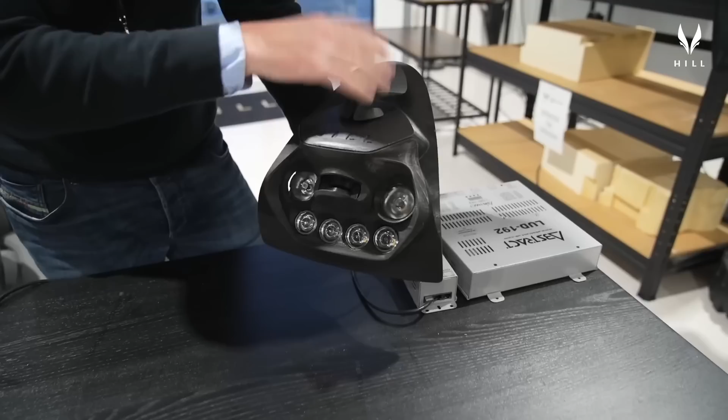So what you can see here is the inside portions, and none of this has been finished with chrome coatings or any of that yet — this is purely rapid prototype material. So we've got the 3D Hill badge on the top of the unit. We've got a bright chrome Hill emblem, and that's what you'll see when you walk up to the aircraft. And then below the center, we've got the forward portion of the anti-collision light, and I'll demonstrate the rear version of that in a second. And then we've got the optics for the LED landing lights right here.

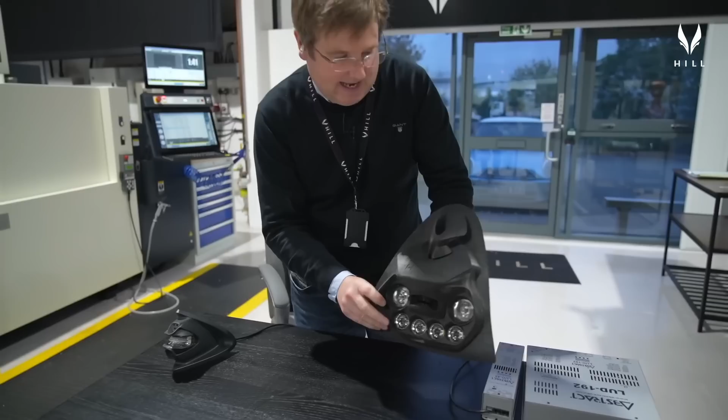So if I just pop those on for a second — all of the electronic and optical design for these has been completed. I'll just knock them off center so I don't kill the camera. All of the heat sinks and the electronics are packaged within the module, and these things will literally light up anything that you want to. They're incredibly powerful, so we've got a little bit of tuning to do to get the spread and the level and intensity right. But these things are working a treat. The finished versions of these, with all the appropriate finishes and packaged into the lenses, are being built right now as I speak. So really excited to see those things come together. Our lighting production partners have done an absolutely incredible job.

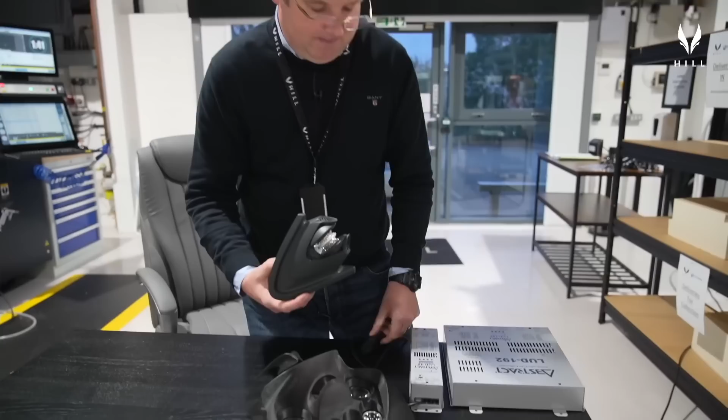Let me just show you the tail light cluster. I'll pop that down there for a second. So this is buried into the tip of the ducted fan. You've got a chrome finishing piece around here, two contributors to your rear navigation light, and then your anti-collision beacon fits right there. This thing has got an incredible range of visibility. So if I just knock that on for a second — I'll just turn it away from Milan so it doesn't blind him — but that's all operational.

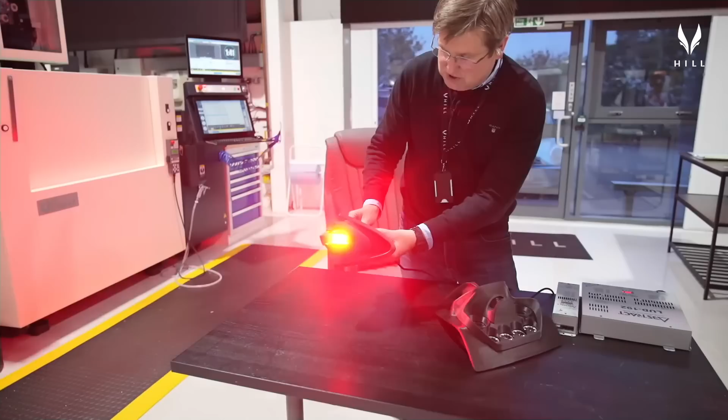We're using some proxy drivers at the moment rather than the correct airworthy drivers, because this is all about the optical performance — getting the manufacturing engineering of these clusters right, and then of course getting the heat rejection right for the various environments these things will be operating in. So really pleased with how these things are coming on. We've got a little surprise for you with the strip lights that run down the side of the fuselage, and we should have the wingtip lights in this state within the next week or so. So really pleased with how the lighting hardware is coming together.

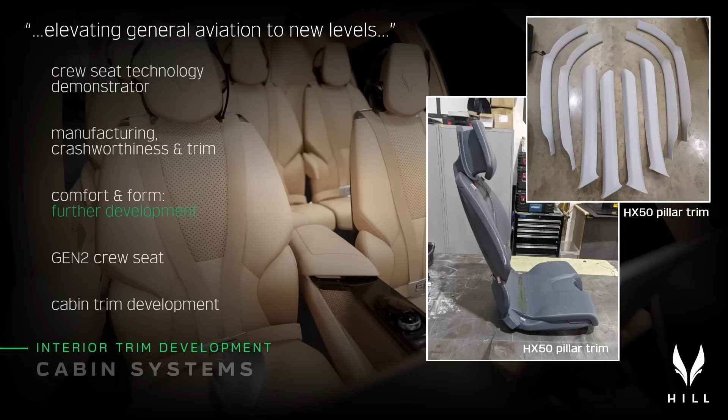In terms of the interior, it's been a busy month on the interior. We've been doing a lot of work on our crew seat. If you remember back to our last global meetup, we put a technology demonstrator on the stand. This brought together the crashworthiness, the composite structures, the trimming essentials and structures, and all of the other elements that we need.

What we're doing now is taking that to a new level with a Generation 2 crew seat. This goes back much closer to our original design intent, brings all of those technologies together, and delivers a really beautiful and comfortable seat. What you can see in the inset picture is some of the underpinning structure that we're testing at the moment before it gets trimmed and finished off.

That work's going on right now with one of our partners. The other thing we're working on at the moment is all of the interior surface of the aircraft, which obviously has to be trimmed, so that requires substrates. We've been designing all of the clip-on substrates for trimming your pillars, your roof linings, your chin beams, and all of the other things required to deliver that plush automotive grade interior that you all want for HX50.

So really pleased with how that work's been coming on, it's really coming together. I would ordinarily do a quick walk around at this point, but I'm conscious of time. I'll just quickly show you two things while we're here.

In terms of the skid development, what we've got here is the last of the receptacles that will go into fuselage 7, and this is what the front skid connectors are attached to in the fuselage. This is how we get the loads into the fuselage.

And then on the 3-axis at the moment, you can see that we're busily producing the first lower half of the gearbox casings for the 3 gearbox casings we're producing for December.

So that's pretty much what we've been up to over the course of the last few weeks in terms of mechanical components. Let's talk briefly about some additional production facilities that we're developing.

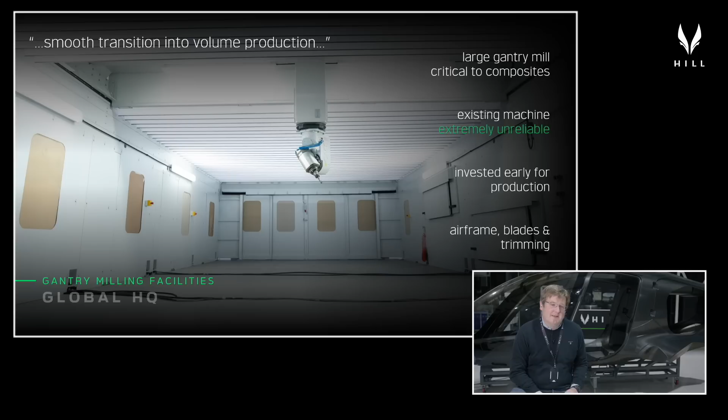I mentioned while we were down at DC2 that the gantry mill has become somewhat problematic for us. Gantry mills are critical to composites because we need to make vast patterns, vast molds, and then we need to trim these large composite components, trim glazing, and that requires these great big CNC machines that can do that reliably and repeatably. These machines are different to the machines that we have here because they have to have extensive dust extraction and manage large amounts of material removal.

Our gantry mill was bought secondhand during the pandemic, simply because you couldn't get anything at that time and we needed to progress. But the machine has become so unreliable now that it's costing us significant amounts of time in the program. So we've elected to purchase the first of the gantry mills that we'll use in production. We've invested in a vast 8.5 metre by 5 metre by 2 metre working envelope gantry mill.

This will be the machine that produces all of the production tools. It will produce all of the production patterns. It'll trim all of your windows. It'll trim all of your doors. It'll do all of those operations, and it lands here in the UK in January this year. So from January, the kit that we need to produce all of these things for your aircraft will be with us and will be working.

It has, of course, landed me with another slightly challenging problem, which is it is bigger than any of my facilities. So we're going to need some more space, and we'll get onto that in just a second. But the other thing this machine does as well: this is the machine that produces your composite rotor blades. It produces those tools for the rotor blades that we go flying with.

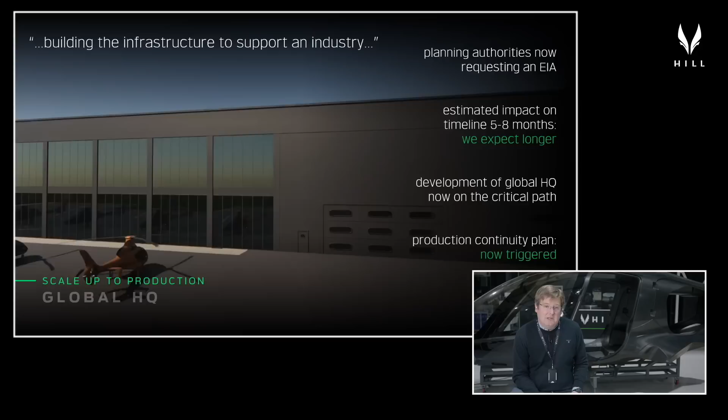Let's give you a quick update on where we are with the production facility. As you were aware, we were due to be submitted to committee a little while ago. That was delayed, it was delayed again, and now the planning authorities are requesting that we do what they call an environmental impact assessment. They estimate the timeline for this will be between 5 and 8 months. Given what we've seen so far, I think it'll be longer than that. So the development facility is now on the critical path, which means we have to consider our production continuity plan.

That's what we're doing now.

So our next step is essentially to take on a large rented space that will give us all of the room that we need to complete the development and then move seamlessly into production. There's plenty of these facilities available in our area. We're in negotiations with a number of facilities at the moment. We haven't yet decided on the exact site or size, but this will be done before the event in December.

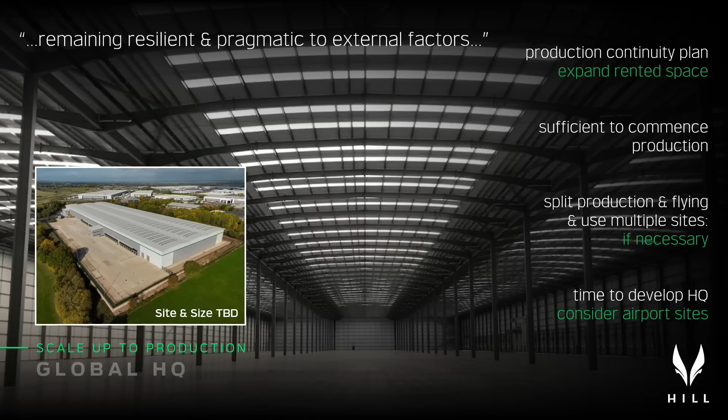So there's some decisions to make, whether we split production and flying or whether we use multiple sites. All of those options are open and they make no difference to our ability to deliver. So we're getting on with this right now, and we're just making sure that we can stick as closely as possible to our declared timelines. So really pleased with how this is coming along.

The other thing this does, of course, is it means we can take as long as we need to develop the HQ, and it also means we can consider sites at airports, which makes the whole planning issue a lot easier as well. So what we've done here is, rather than being held ransom by a challenging environment, we've taken a very pragmatic sidestep, and now we move on at full speed.

So with all of this fun stuff happening, sales have continued to roll in at quite a pace. We've now sold 765 X's, 178 C's, giving us a grand total of 943 aircraft. So just 57 to go until that magic 1,000 number. We're in 67 countries. There has never been a better time to join our community. So if you don't want to wait too long for your helicopter, come join us now.

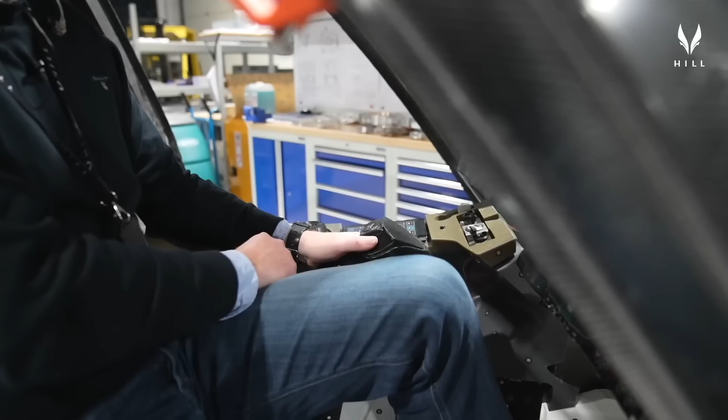And then in terms of throttle control, with any FADEC controlled aircraft, you don't have a manual throttle on the grip. Essentially, you have a fly and an idle mode, so just a toggle switch that's on this space on the side of the collective here, where once the engine's running, you can click it from ground idle up to fly. And it's really as simple as that.

So I really love this installation of the collective. I think it's far more comfortable. It's really compatible with touring, it's really compatible with VFR flying, and so yeah, it's a benefit. It's certainly not anything to be frightened of, and we're not the first people to do this. If you look at the collective installation in the Gazelle, that's far more upright. If you look at the old Bell 230 and 430 series, they did a very similar thing.

The only other thing to say is on the co-pilot side, it is a conventional handbrake style collective implementation, and the reason for that is if you have your fore and aft collective on the co-pilot side, it gets in the way when you're trying to get in and out. So we've put a conventional one on the other side. Okay, excellent. Thanks for the demonstration.

That's nice to see. And the next question is from Bill. Will the ducted fan sound similar to a Gazelle or an MD600? MD600's got a NOTAR, so it won't sound anything like that. It won't sound like a Gazelle. It will be a little bit quieter than a Gazelle. The early Fenestrons were quite noisy. It'll be a little bit quieter than that. The best proxy you've got is an EC120.

All right, the next question has already been addressed a couple of times in AMAs, but it's never bad to refer back to it, so it clarifies. Judging from the high-tech digital cockpit, it would seem like this is a fly-by-wire cyclic and collective, or is it hydraulic or mechanical? Well, it's almost completely conventional. So it is a mechanical flight control system.